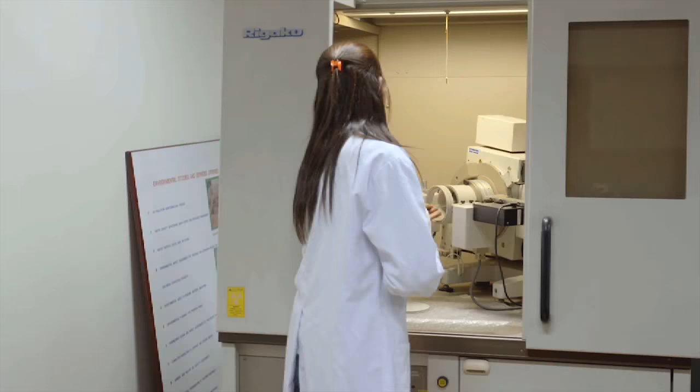Central Building Research Institute, one of the 38 constituent laboratories of Council of Scientific and Industrial Research, is the seat of building science and engineering located in the serene foothills of the Himalayas.

Mission: to carry out research and development on all aspects of building science and technology and assist the building industry in solving problems of planning, designing, foundations, materials and construction, including disaster mitigation in all kinds of buildings with a view to achieve economy, comfort, functional efficiency, speed, productivity in construction, environment preservation and energy conservation.

Vision: CSIR CBRI to work as world-class knowledge base for providing solution to almost all areas of building design, habitat planning and construction, including the building materials, construction technology, fire engineering and disaster mitigation.

We have contributed so much to the building industry that each and every house in different parts of the country have something to do with CBRI. As far as the technologies and materials are concerned, I can say that not a single house in this country is constructed without any contribution of CBRI.

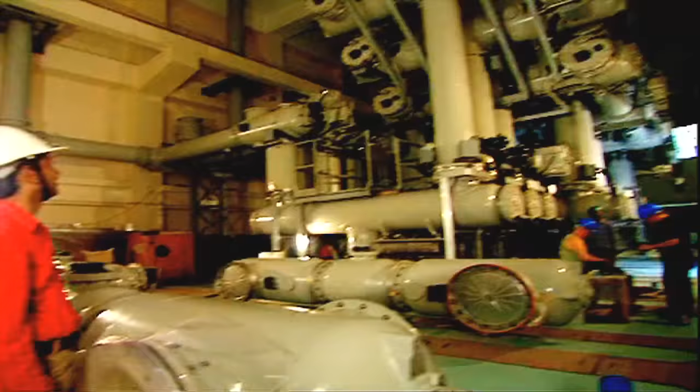Shelter is the primary need of all living beings. An architecturally well-planned building ensures quality of life and safety to the occupants within limited resources of time and money. All buildings, whether residential, educational, industrial, commercial or healthcare, have to be functionally efficient.

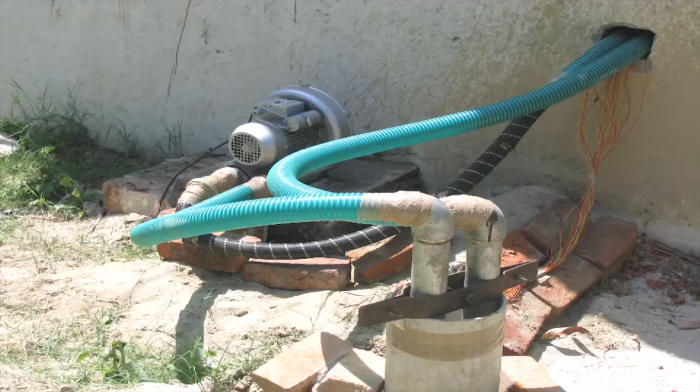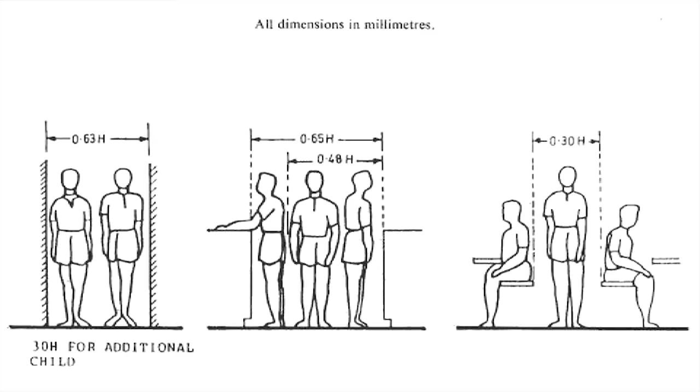It is fitting that at this solemn moment we take the pledge of dedication to the service of India and her people and to the still larger cause of humanity. The nation decides to establish science laboratories as temples of modern India.

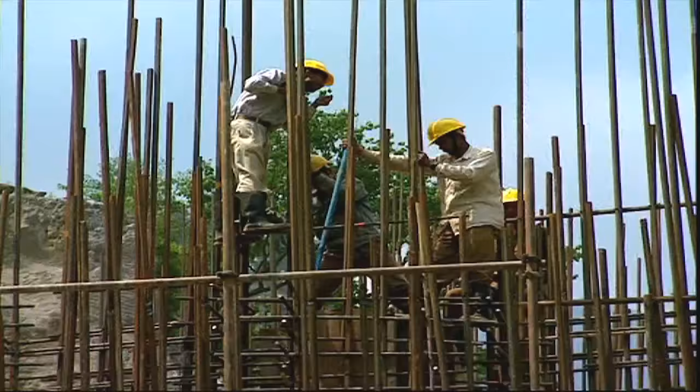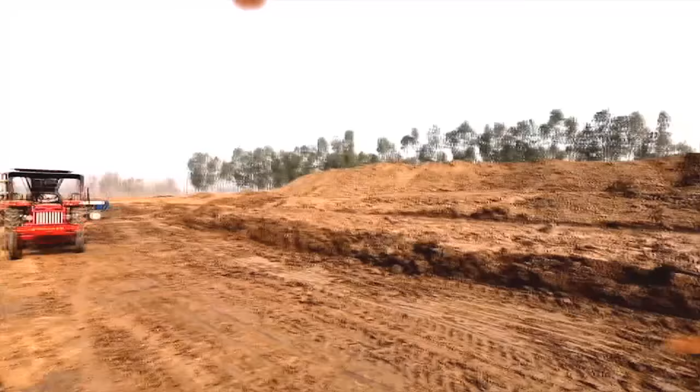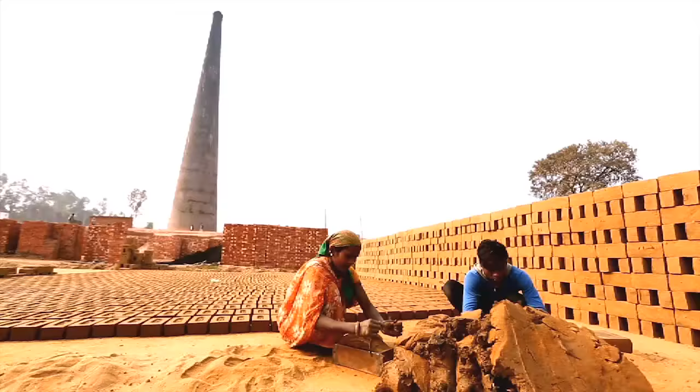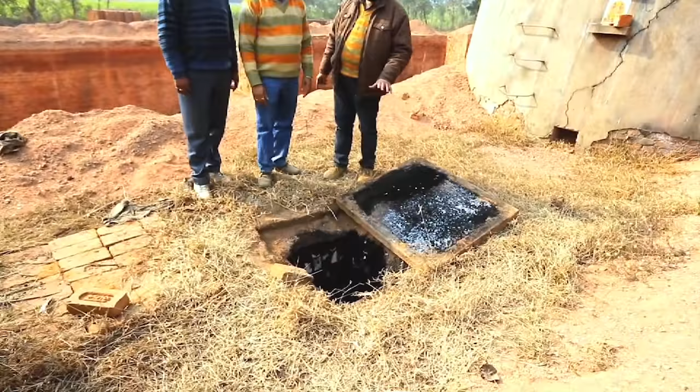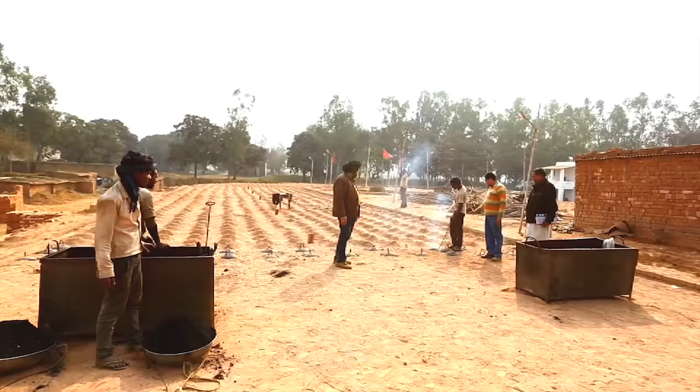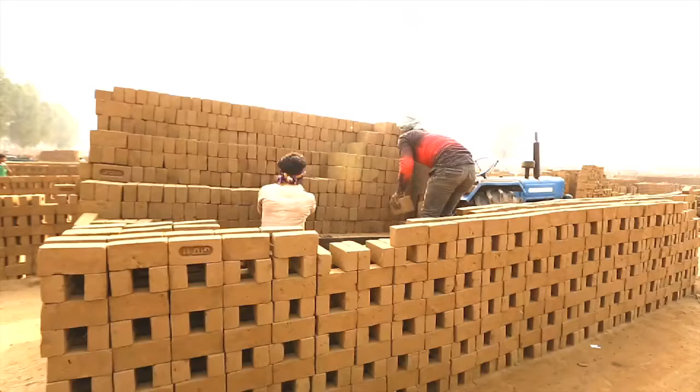Bricks are one of the most important components of any building structure, but the brick industry of India was not able to meet pollution standards. The CSIR CBRI developed technology came to the rescue of the brick industry. The high-draught brick kiln, fixed chimney brick kiln and gravity settling chamber have contributed in reducing fuel consumption by about 20% and in reducing air pollution. The Bricks and Tile Manufacturing Association of India has adopted this process in about 40,000 brick plants in India.

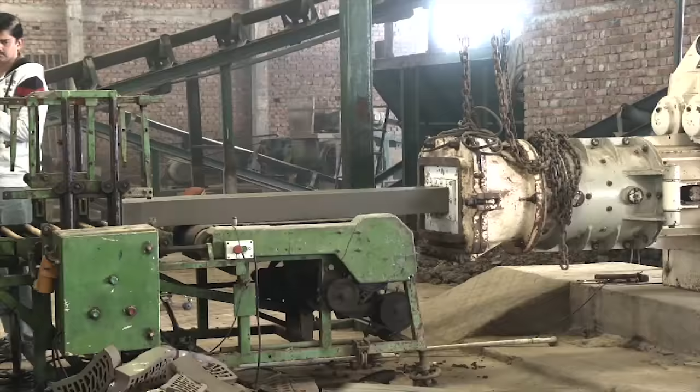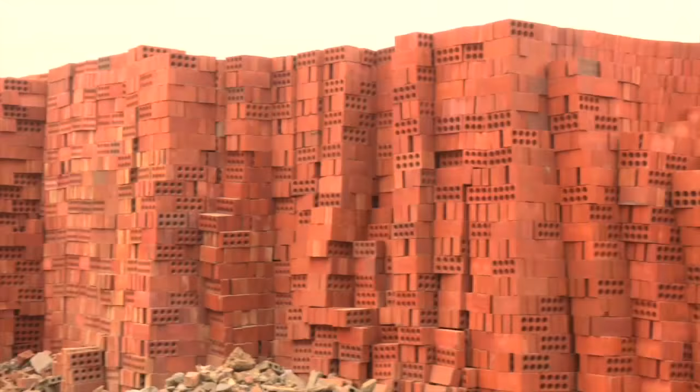The institute pioneered and patented a semi-mechanized brick-making machine with de-airing unit that can extrude about 4,000 high-quality bricks per hour. The machine is in great demand all over the country. Delhi and Chandigarh are examples where these high-quality machine-made bricks have been widely used in building construction. These machines' extruded bricks and tiles are more impervious and have therefore been selected by irrigation engineers for lining canals to reduce water seepage.

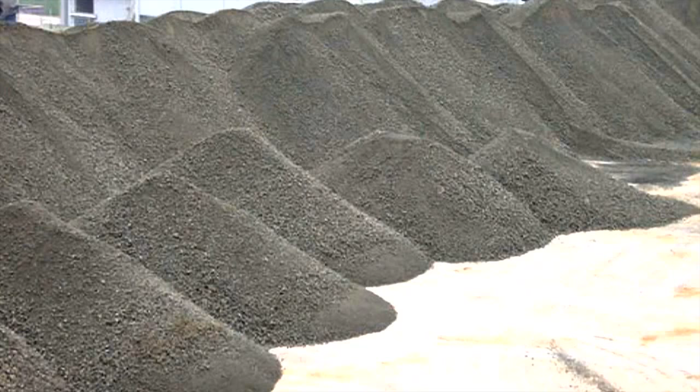The CSIR CBRI contributions in the development of Portland Pozzolana cement, cold twisted steel bars, under-reamed piles, single stack system of plumbing.

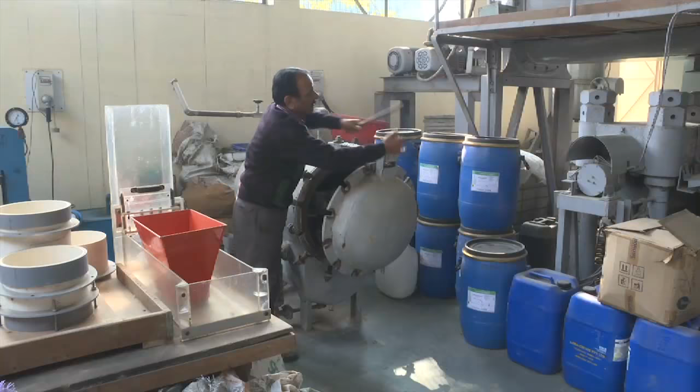It is fitting that at this solemn moment we take the pledge of dedication to the service of India and her people and to the still larger cause of humanity. The nation decides to establish science laboratories as temples of modern India.

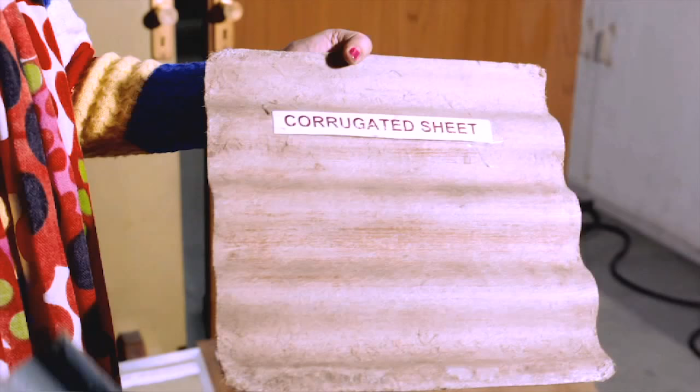In the summer of 1947, the Council of Scientific and Industrial Research selected 5 young scientists to start functioning as Building Research Unit. Sri Prakasha lays the foundation stone of the institute on 10th of February.

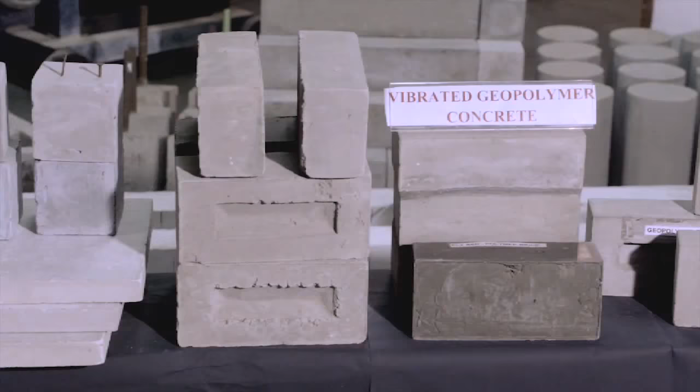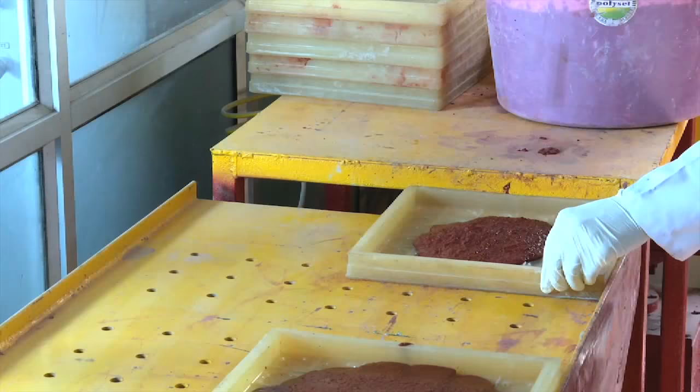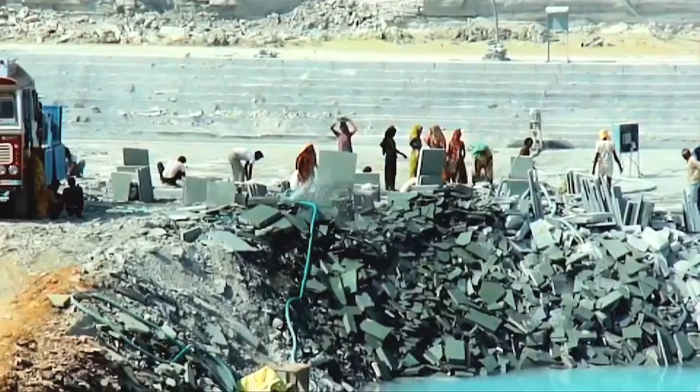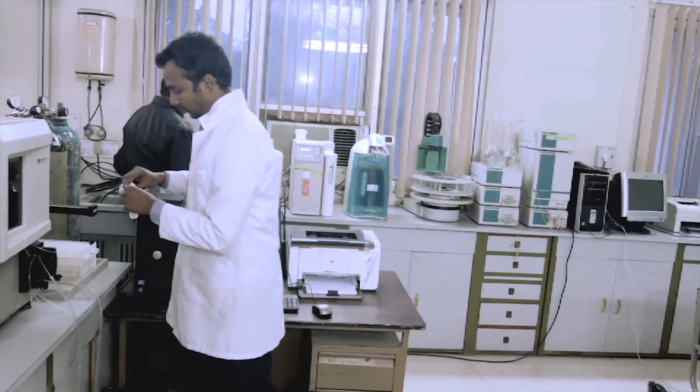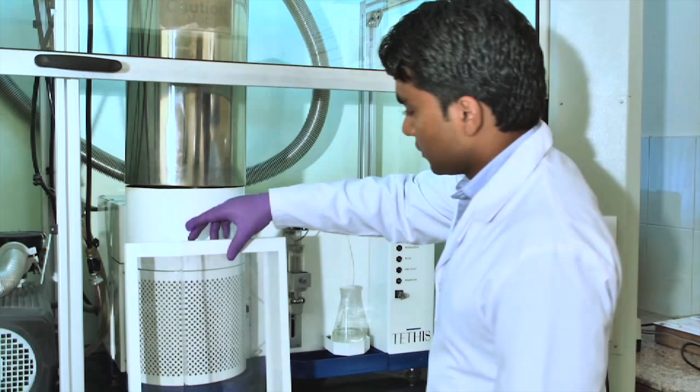Techniques have also been developed for removal of heavy metals from water using fly ash and its subsequent use in the production of value-added building components. Advanced chemistry and nanoscience has helped the scientists to understand internal structure of building materials, their reaction with surroundings, and the process of aging and decay.

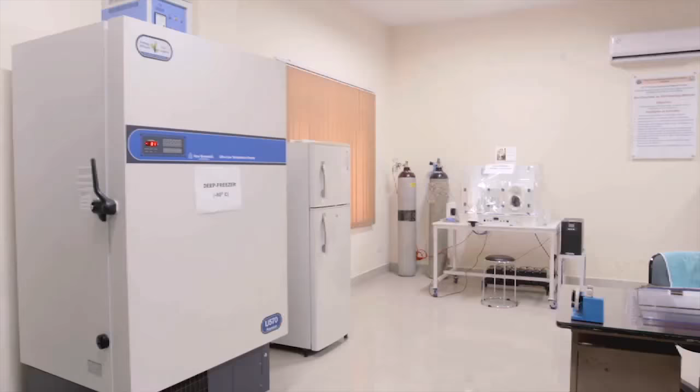Nano-engineered concrete develops strength at a much faster rate and requires less water. Bioconcrete is self-healing material that can repair cracks automatically by bacterial deposition of calcium compounds in the cracks.

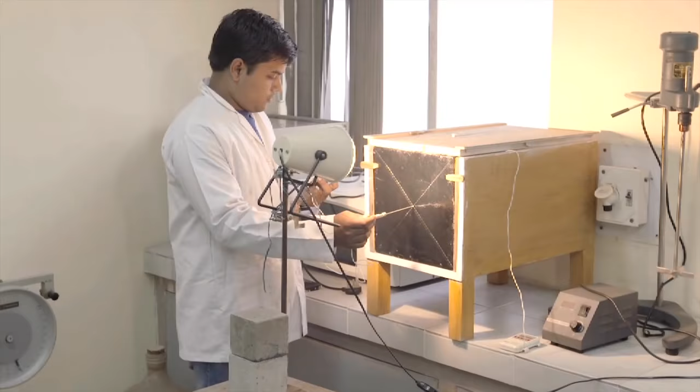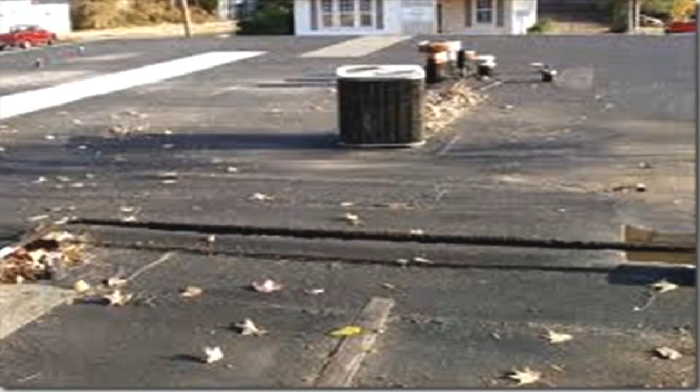IPN coatings and processes for waterproofing of building, corrosion control of steel, and concrete structures are important areas of research for the material scientists. Improved bituminous waterproofing and sealing compounds are important materials to check water leakage and seepage in the buildings. Translucent concrete can provide natural day lighting indoors and save up to 30% of energy in lighting.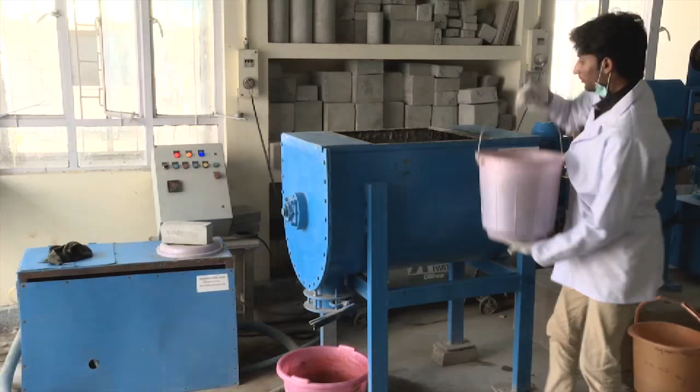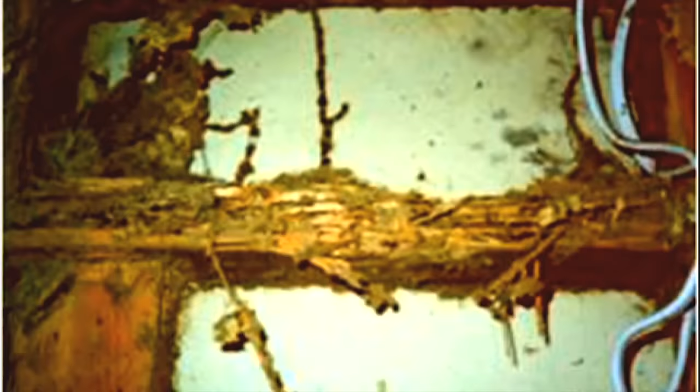Lightweight building components for high-rise buildings is another area CSIR CBRI has been working on diligently. The institute has studied environment-friendly anti-termite chemicals as well as anti-termite barrier for buildings to reduce termite-related losses in the buildings.

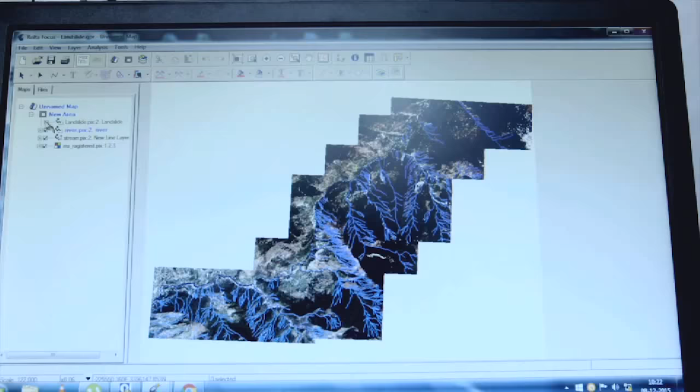The institute has advanced facilities and expertise in structure and foundation engineering and to study geological conditions of construction sites. Landslide risk mitigation, measuring ground movement and micro-zonation of risky or safer areas is also an important area of research of the geotechnical scientists of the institute.

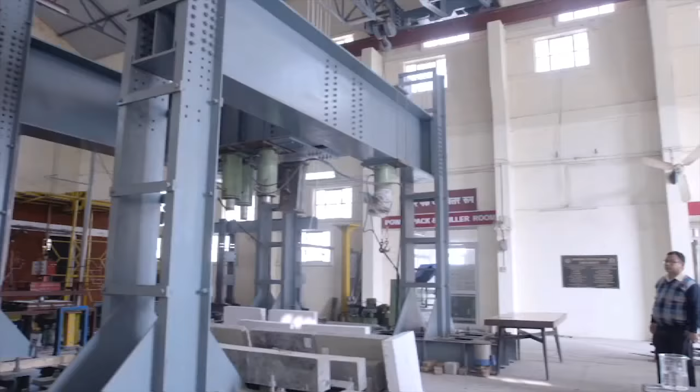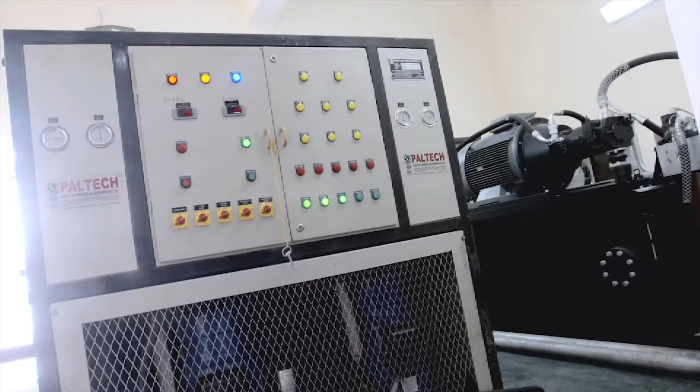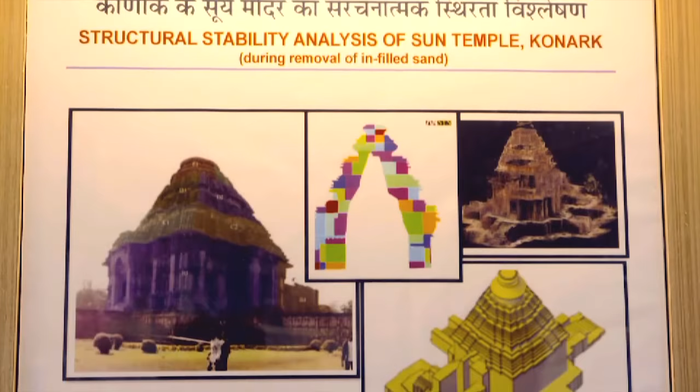Specialized expertise of the geotechnical and structural engineers of the institute and world standard investigation facilities motivated the respective departments to get heritage buildings like Taj Mahal, Qutub Minar, Konark Temple and Chittorgarh monitored for their structural safety against growing human and industrial activities in their vicinity.

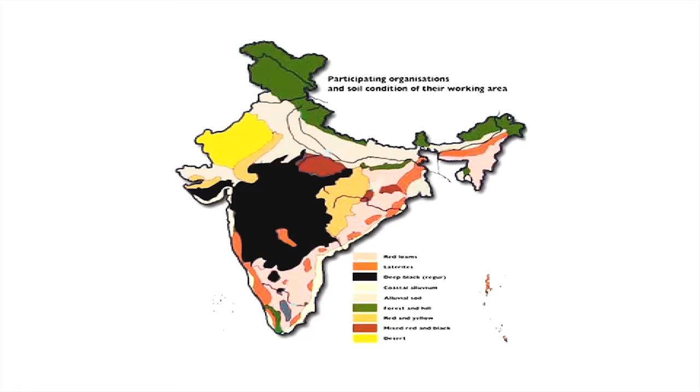Such buildings are affected by the vibrations caused by rock blasting, mining operations and flights of jet planes near the airports. Buildings in black cotton soil areas suffer from differential settlement and cracking due to moisture variation in the soil.

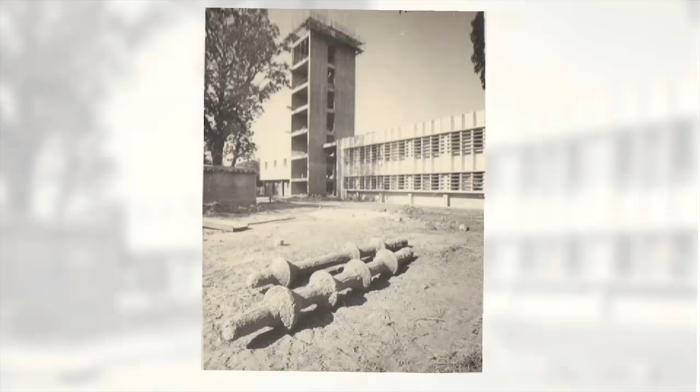Underreamed and bored compaction piles are perhaps one of the most important contributions of the Institute for the black cotton soil areas of India. These piles have also been used in filled-up soils and for tall structures like microwave or electric transmission towers.

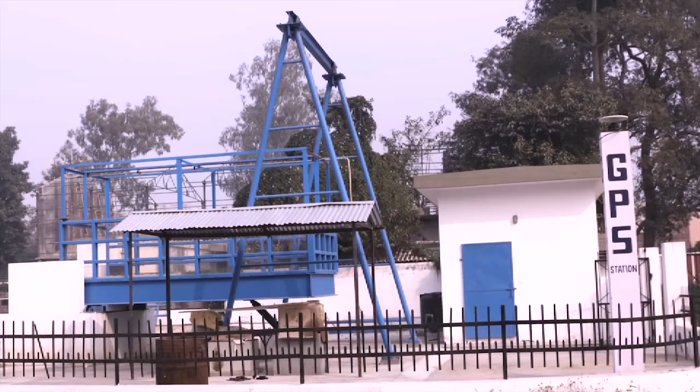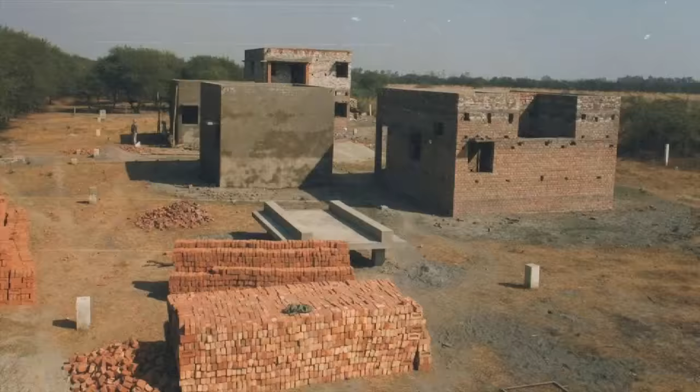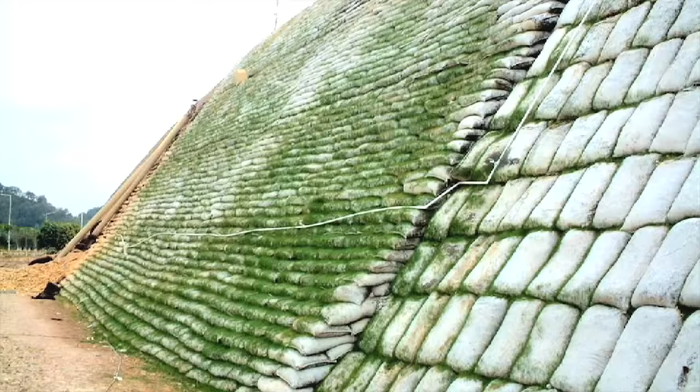CSIR CBRI is also known for development of processes for ground improvement and treating old fly ash ponds for building construction. Fly ash and red mud waste can also be used in constructing embankments with CSIR CBRI know-how. Stabilization of hill slopes by stitching technique, geotextile and drum diaphragm walls has been successfully demonstrated in the landslide-prone areas.

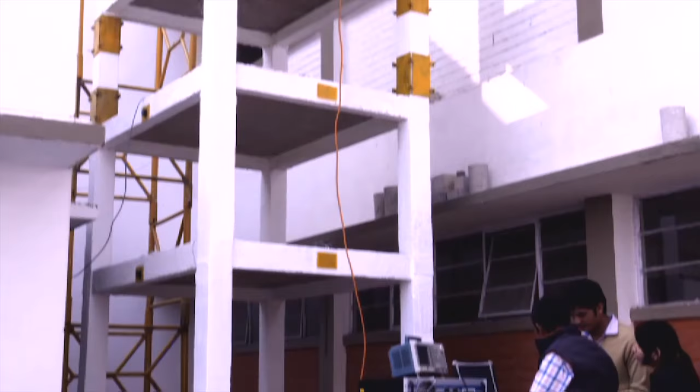Building structures are also prone to aging, moisture movement, corrosion, fungus, algae, vibration and creep, and therefore buildings need regular health monitoring and care. In fact, it is an area in which CSIR CBRI excels. The other area of great importance is disaster mitigation and fire engineering.

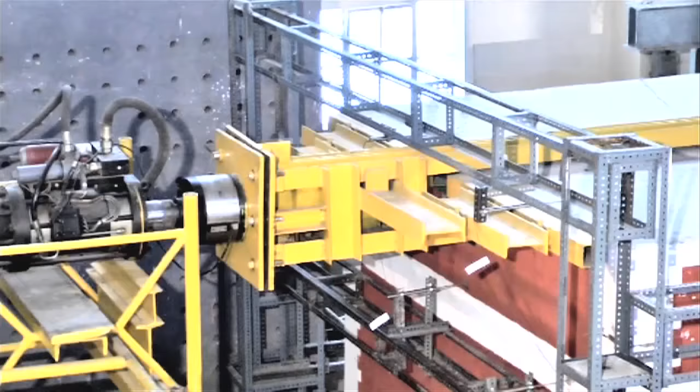Safety from nature's wrath is essential even when a building is in good health. Buildings can get severely damaged under the influence of the forces of nature. Natural and man-made disasters like earthquakes, cyclones, floods, landslides, fire, tsunamis, avalanches and mudslides can destroy life and property. CSIR CBRI is well equipped to assess vulnerability of structures against the various disasters.

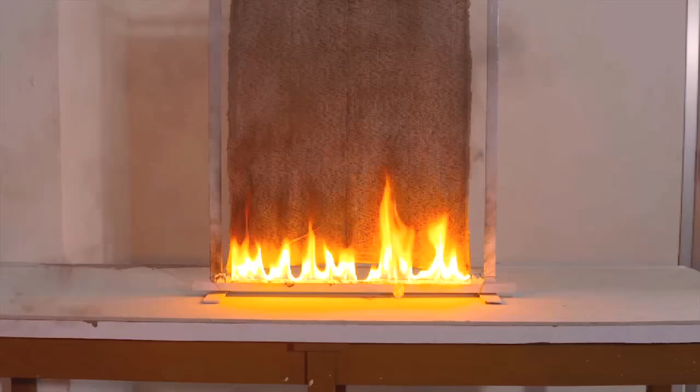Fire can engulf and destroy everything that comes in its way. Highly advanced equipment and expertise to study fire resistance of various building components is a unique facility available at this institute.

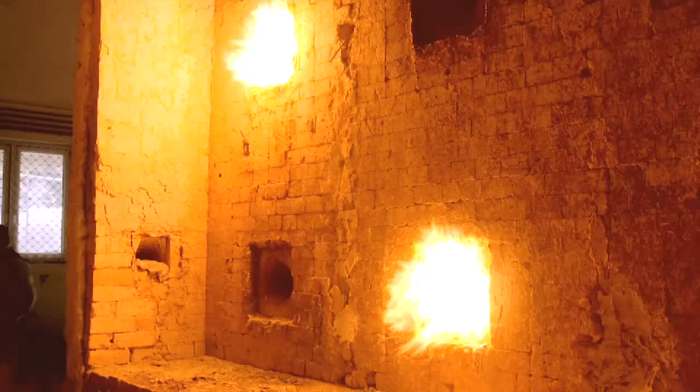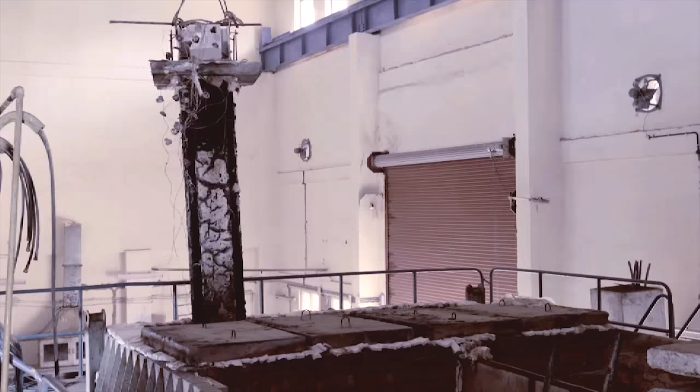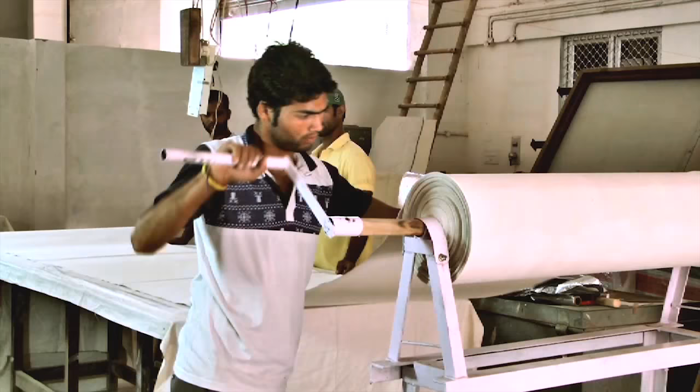Expert services of this lab are regularly utilized by top industrial houses of the country to test and develop fire-resistant building components, security equipment, electric cables, fire check doors, cable fire stop and so on. Fireproof canvas, wood and foam are highly acclaimed developments of this lab. Fireproof canvas developed in this institute has been used in making temporary shelter at Ayodhya and even in aircrafts in

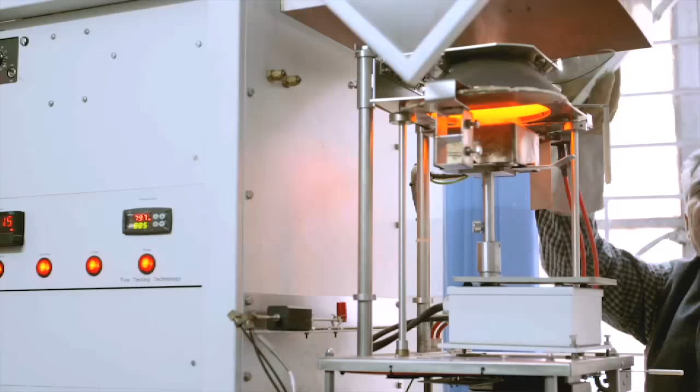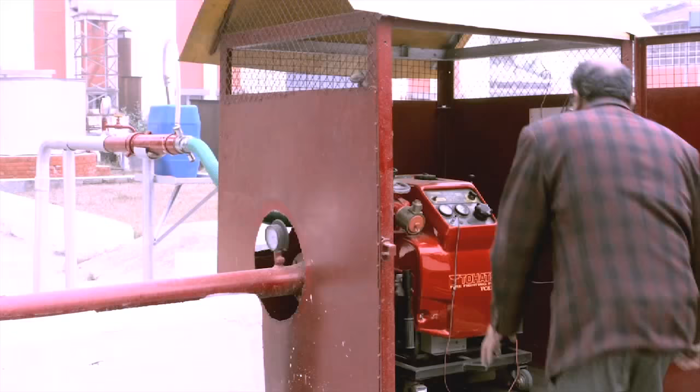India. Scientists study the fire properties of different building materials to assess how long they can resist fire and how much of smoke and toxic gases they generate. The lab is equipped to study and check oil tank fires, explosions of gases and automatic fire detection and control systems. New devices to fight fire in small residential buildings by direct foam injection have been developed by the researchers of the CSIR CBRI.

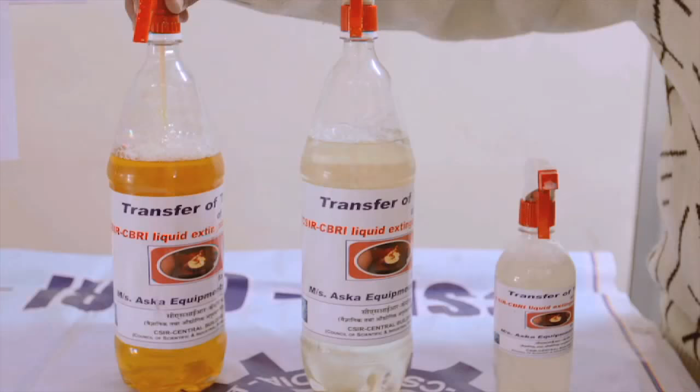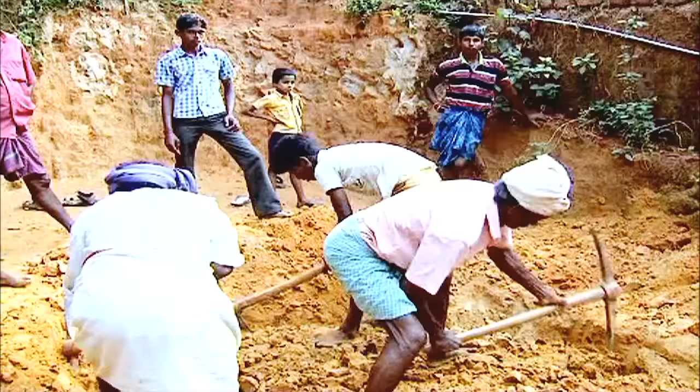Despite all these innovations, it should be possible for common man to improve his living conditions within his limits of affordability. Today, the Institute is all set to contribute towards the success of the mission of government Housing for All by 2022, targeting affordable housing for the 800 million common people of the country in all geoclimatic conditions of the hills, plains, coastal regions, northeast, etc.

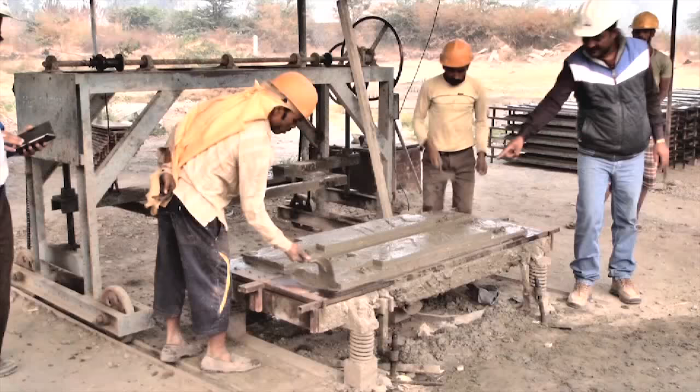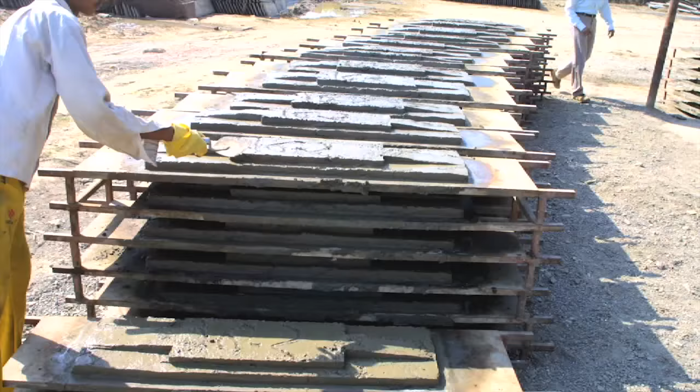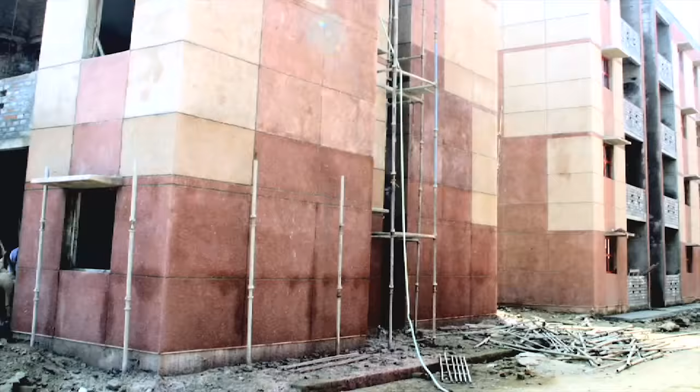Housing of the newly independent country like India was the main concern, and we contributed a lot for providing cheaper and comfortable houses to the masses. Cost-effective building materials and components like prefabricated roofing systems, stone masonry blocks, precast stairs, lintel cum sunshades, pile foundations, pyramidal roofs for cyclone-prone areas are some of the most widely adopted technologies in mass housing projects of various central, state and private housing agencies all over the country.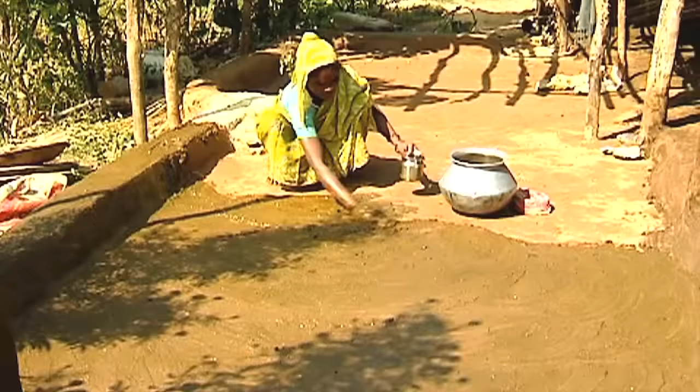Age-old techniques in rural housing are giving way to the advanced techniques developed at CSIR CBRI. Simple building materials like non-erodible mud plaster for mud walls and thatch roofs can provide improved mud and thatch houses in rural areas that can last about 10 times longer and are safer against fire and rain.

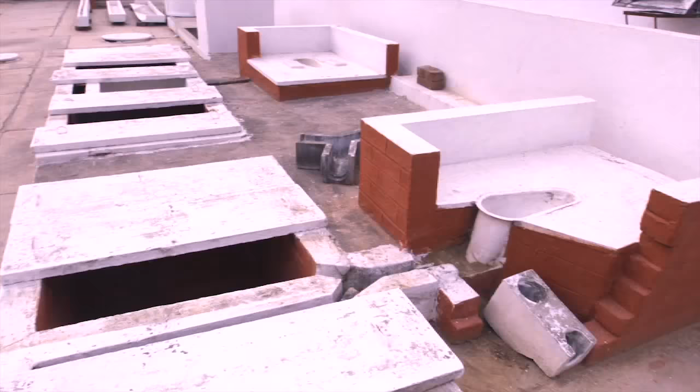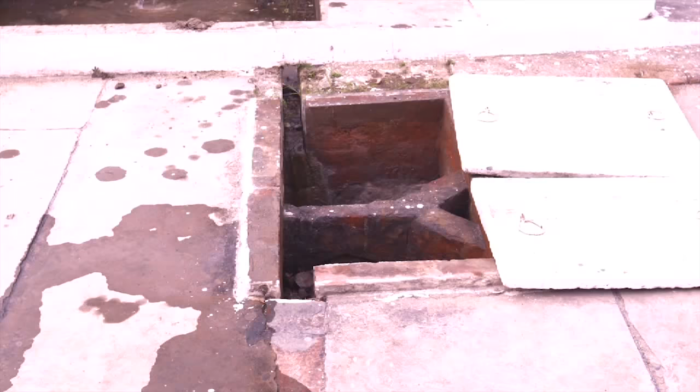This two-pit compost latrine is a simple but effective solution of rural sanitation. More than 1 lakh of these latrines have already been constructed all across the country. This wastewater disposal system in every house can contribute towards the Swachh Bharat Abhiyan and good health of rural people. Such simple but highly effective techniques can have great potential of improving lives of the rural poor using locally available materials and skills.

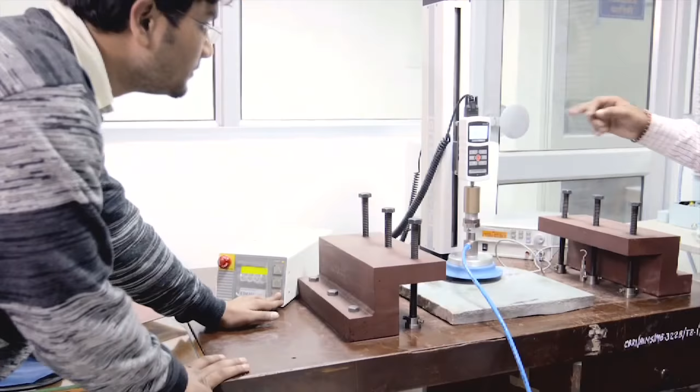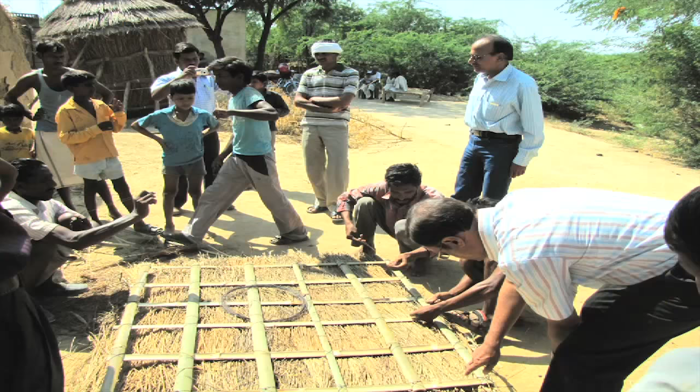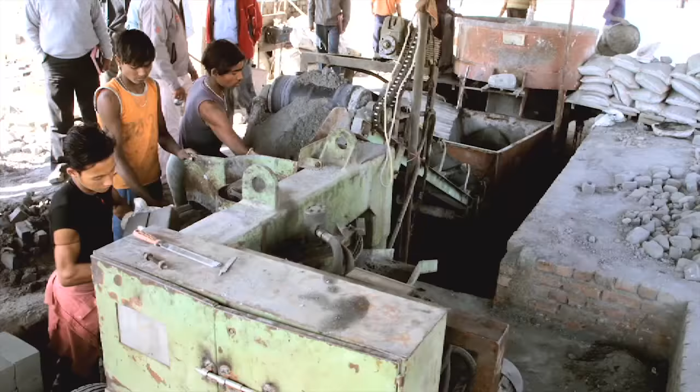The Institute attaches great importance to technology dissemination and extension activities to ensure that the fruits of science and technological innovations reach the building industry and people of the country. The CSIR CBRI boasts of an impressive list of clients who are availing the expert services of the Institute. More than 1 million buildings, hundreds of CSIR CBRI licensees, more than 100 US and Indian patents, 1,000 building centers and production units, BIS codes and the National Building Code of India are a testimony of the impact that the Institute has made on the Indian building industry.

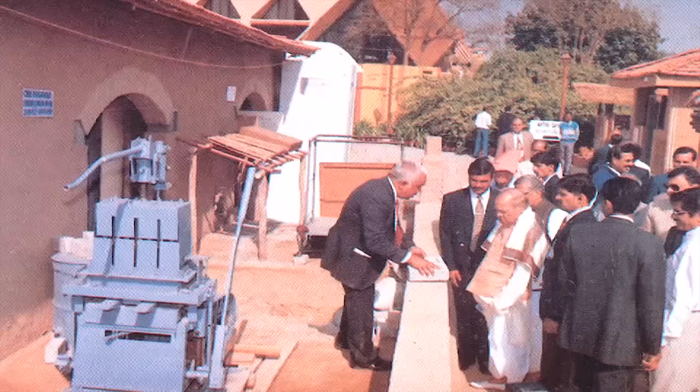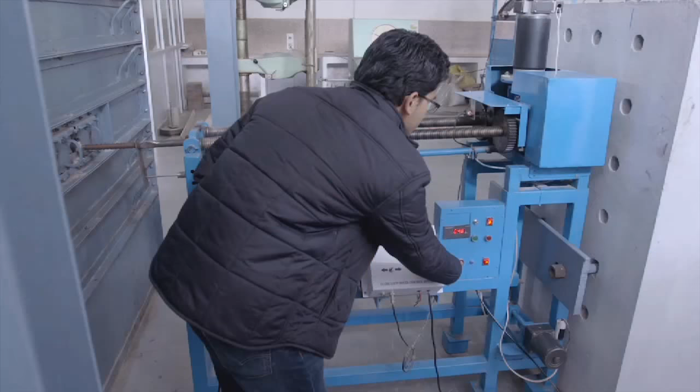A host of government and private agencies have expressed their faith in new building systems and processes by repetitive implementation in their housing projects. The Institute reaches the user agencies through mass media, training programs, exhibitions, seminars and demonstration projects. The coming generation needs professionally qualified manpower to take building innovations to the next higher elevation. The Institute therefore conducts an integrated program on building engineering and disaster mitigation.

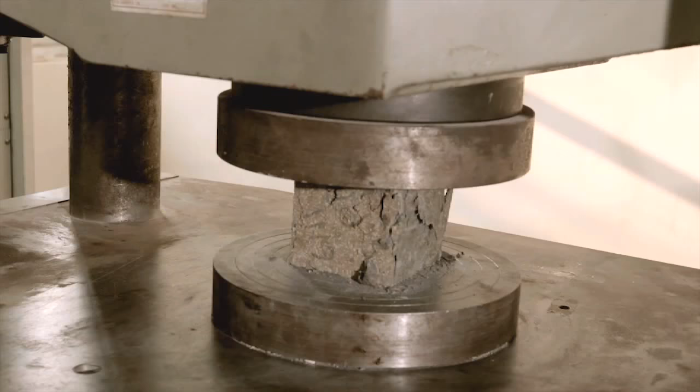Under the Academy of Scientific and Innovative Research, ACSIR, the academic wing of the CSIR, CSIR CBRI has started postgraduate research program on building engineering and disaster mitigation, leading to Master of Technology and PhD in engineering.

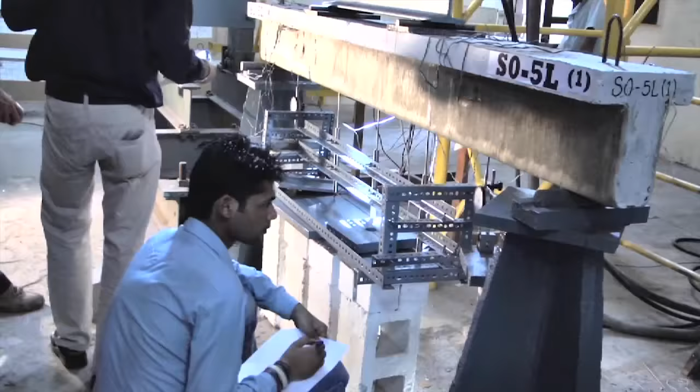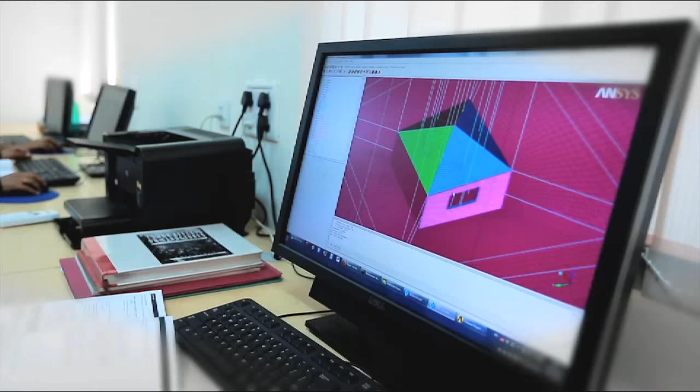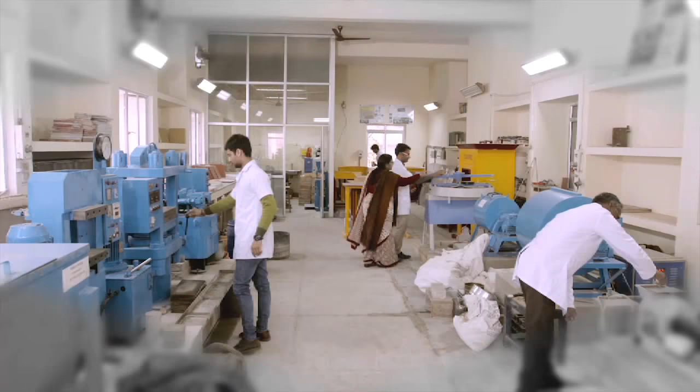The Institute is what it is with the combined team efforts of the S&T, administrative, finance, medical and infrastructure maintenance personnel. The project monitoring and business development teams, the Knowledge Resource Center, IT infrastructure support are the pivots that keep the Institute wheeling smooth and fast. Dedicated efforts are on with zeal and enthusiasm to break the boundaries and tread the paths never explored before in search of the treasure of hidden knowledge to create a sustainable habitat and provide dignified housing to the masses.